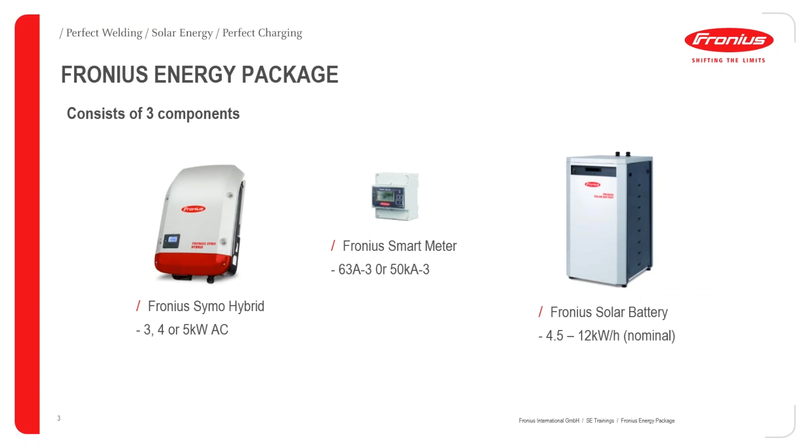So the Fronius energy package consists of three components. That's the Symo Hybrid, which comes in 3, 4 or 5 kilowatts. The Fronius smart meter, being three-phase of course, because it's a three-phase inverter you'll need the three-phase meter. That comes in a 63 amp or the 50 kA, which is the larger. And then you've got the Fronius solar battery, which is 4.5 kilowatt hours to 12 kilowatt hours nominal, at 80% depth of discharge.

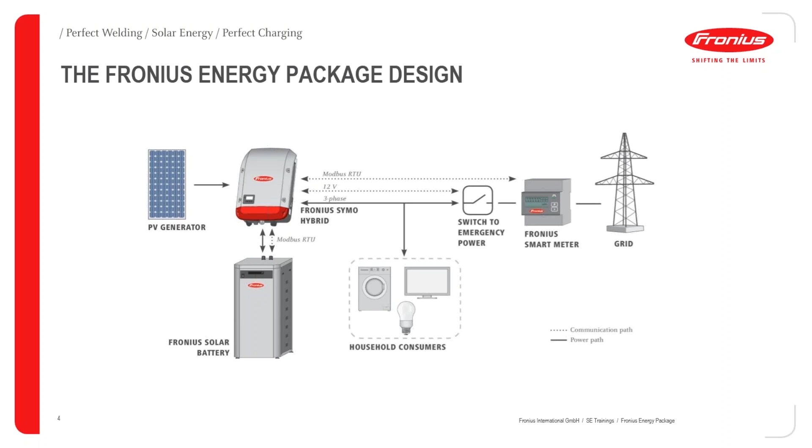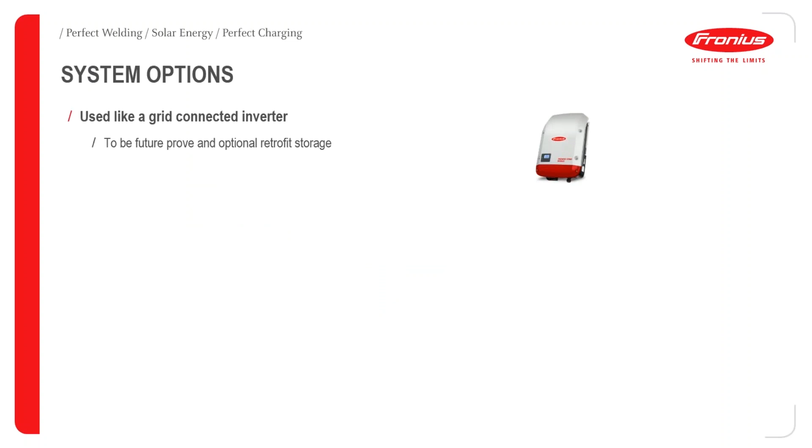So in terms of what it actually looks like, you've got your PV connected to your inverter, and then the battery is a direct connection to that. Then you have your meter, which is placed in the main switchboard and uses a Modbus RS485, Modbus RTU connection, so that the system knows where the energy needs to go, be it from the PV to the battery to charge it or to discharge it. And then you've got the loads there in the middle.

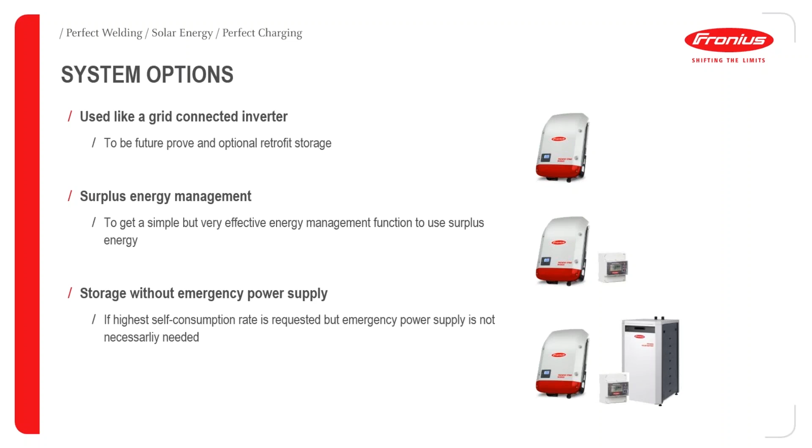In terms of system options, the hybrid can be installed by itself, used as a normal grid connect inverter with your normal PV and no meter or battery. Then you can add the meter at a later date if you want to do some energy management, for example turning on external loads depending on what the site's doing if you've got excess energy. And then also have the battery in there, so any excess power will be stored into the battery.

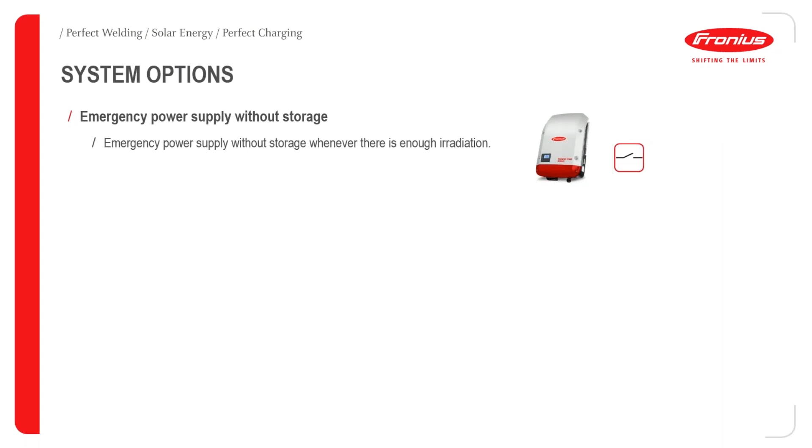When it comes to the emergency power supply, the backup function, that will be available mid-year, so around June, July this year. What that is: if the grid goes down, the inverter will disconnect from the grid through an external contactor, start up in island mode and provide power when the grid's down.

It can actually do that also without the battery. So long as there's enough irradiation, enough sun, you can have it in backup mode even if there's no battery connected. Or if you want the full functionality, obviously with the battery connected, it's a more efficient or more robust option.

Then the Symo Hybrid inverter itself comes in 3, 4 or 5 kilowatts AC rating. That's the AC rating as the sum of all phases. So for the 3 kilowatt version, that's 1 kilowatt per phase, and for the 5 it's roughly 1.66 kilowatts per phase. Underneath that you've got the PV input max, which is 5, 6.5 or 8 respectively.

The reason why that's higher for that particular inverter is because, let's say for the 3 kilowatt version, you can produce 3 kilowatts AC, but the battery can also take in 2 kilowatts at the same time. Or let's say you have 2 kilowatts AC, you can do 3 into the battery, depending on which battery you've got. So the Symo, like the series says, short for symmetrical feed-in, is 3-phase.

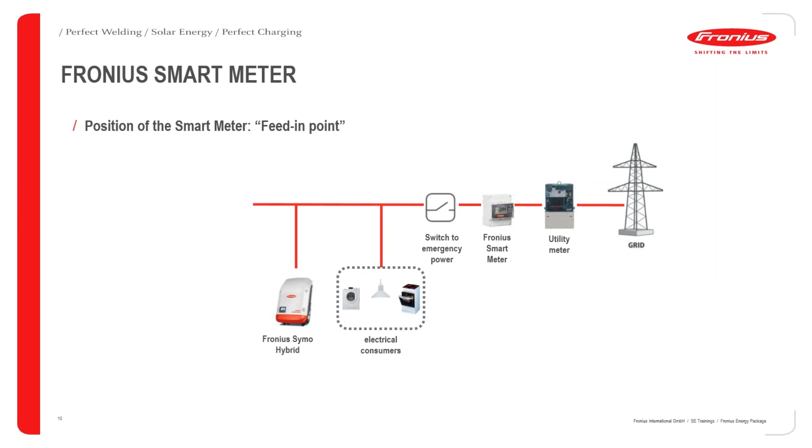So the Fronius smart meter can be installed in two different spots. Some of you may have already used the smart meter a fair bit. When you select the function on there, it talks about feed-in point or consumption path. The feed-in point, which is pretty much all systems here in Australia, is where the loads and the inverter are on the same side of the Fronius meter. So whatever the smart meter is reading, the value of the inverter needs to be taken away from that.

So if you're looking at the emergency power function, that's where the switch would sit. The meter needs to go between the contactor and the utility meter, so that when the grid comes back, the meter can detect it.

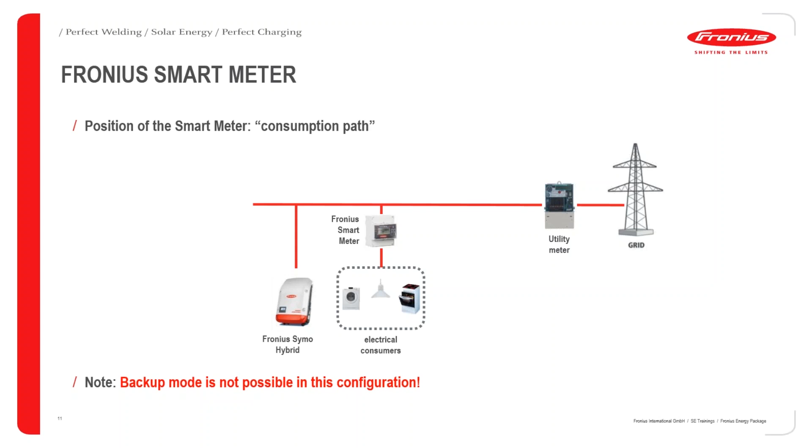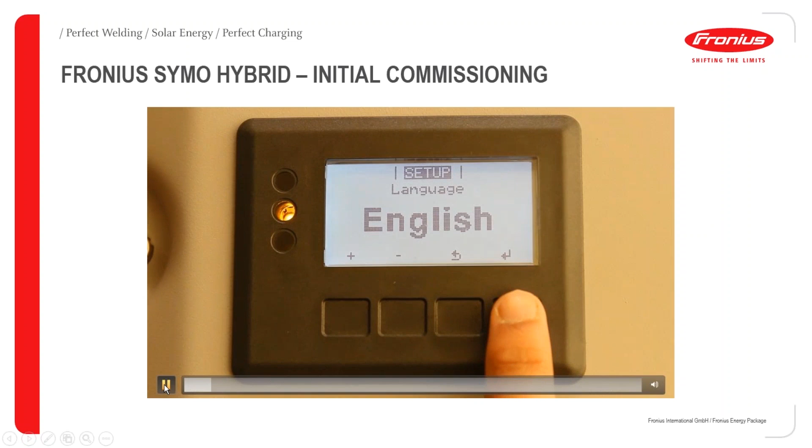The other point, which is shown on the Datamanager or the hybrid manager as the consumption path, would look like this. You can see essentially the inverter is on the grid side of the Fronius smart meter, not on the load side. That rarely happens here in Australia unless you've got gross metering, possibly for New South Wales, but they're coming off there anyway. That particular constellation could get used in Europe.

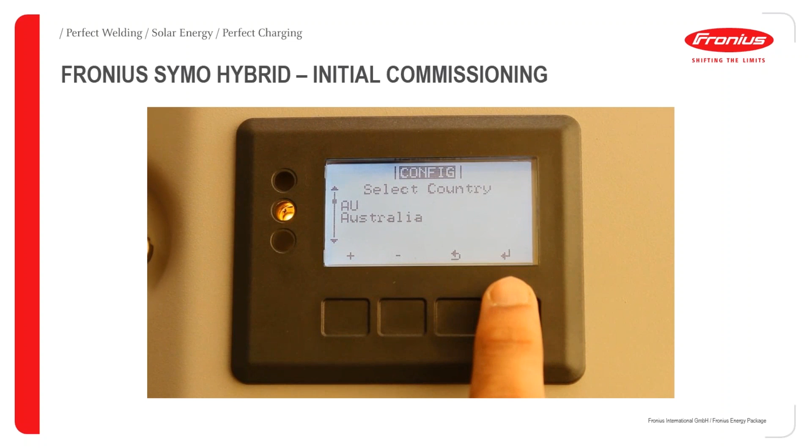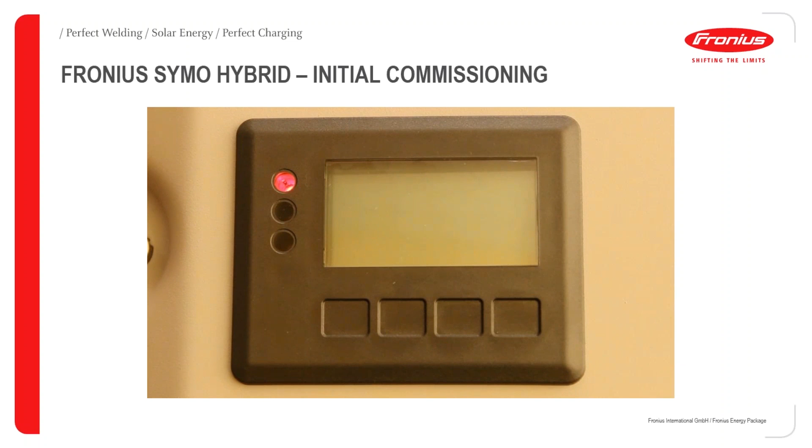So we'll get on to the Symo Hybrid commissioning. In terms of setting up the inverter itself, when you first switch it on, it's like all of the Snap inverter range. It comes up with English on the display, and I'll just play this little video and talk you through that. When you press English, it'll say wait, and it'll ask you to select the country setup. In Australia, some people get confused with using the 50 Hertz. Australia is 50 Hertz, but Setup Australia is the one you want to select.

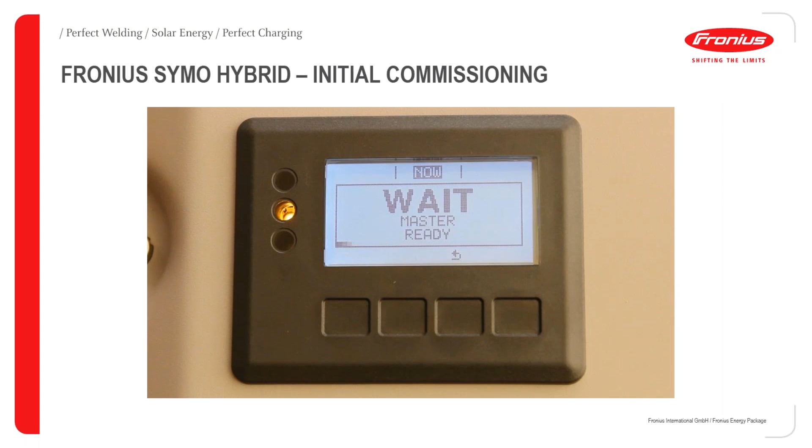When you do that, it'll take about 30 seconds or a bit longer until it actually loads the country setup. All the lights will flash on and off, and then it'll come up with wait master ready or wait communication. If there's DC connected, it'll start up. But this particular model we've set up in our showroom doesn't have any DC, so it just comes up with the info page. That's the initial switching on of the inverter. You may be asked for the time and date, so you just need to enter that as well.

Okay, then to the hybrid manager setup. In the inverter itself, if any of you are familiar with the Datamanager, it's a very similar board. We call it the hybrid manager because there are a couple of little differences between this and the Datamanager. There are a lot of similarities, but there's the odd little difference. One of the main things, if you look underneath the hybrid inverter, you'll see the USB slot is covered over with a little cover. That's because the software updates are not done via USB, as opposed to the other Snap inverter range.

The Symo Hybrid has different software running in the inverter compared to the other units, and that's why it doesn't get done via USB. All of the updates get done via the internet, as you would do a Datamanager update. You'll also notice that there's no master-slave switch on there. That's because only one hybrid can be in the system at one time, because the hybrid inverter is part of an RS485 communication loop, and the inverter is the master in that, and in an RS485 loop you can only have one master.

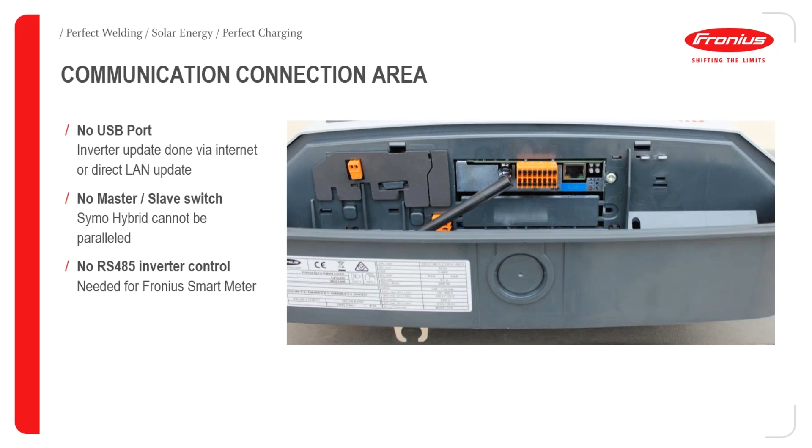So the meter and the battery, if they're in the system, they're in there as slaves. So that's why you don't have the master-slave switch. And the one thing to remember as well is, if you're looking at using external controllers to control the inverter, you can't control the inverter via RS485 as you can with the other ones, because we use that port for the meter. So if you did want to externally control the inverter, then you can do that via Modbus TCP, which is done via the LAN port if needed.

Okay, just to give you a bit more of a close-up of the hybrid manager there, you can see on the left there you've got your Wi-Fi antenna like usual. There's the Modbus termination switch, so depending on where the inverter or the battery or the meter sits in the chain, always the first and the last component needs to have a 120 ohm termination resistor there. So if the hybrid inverter is the first one or the last one, so not in the middle, then that little 120 ohm resistor is already built into the card, but as a switch, so you can turn it on and off. So just above where the antenna is, there's this tiny little black switch, which you need to switch to either on or off depending on the situation you're in.

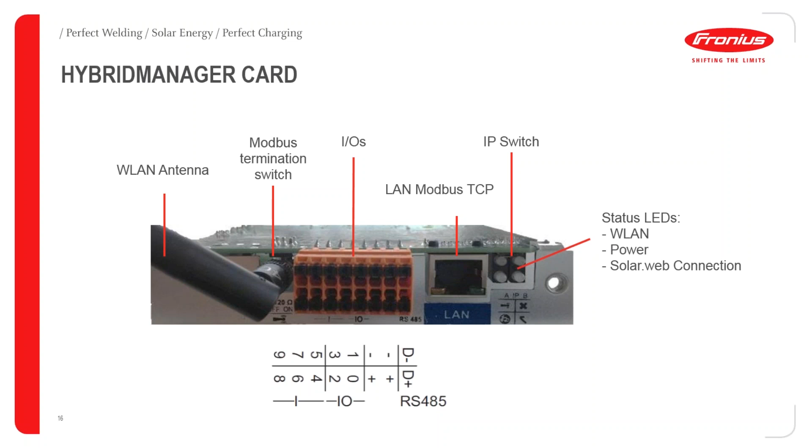Then you've got your I/O ports there. You can see the configuration down the bottom with your D- and D+ for your Modbus ring, and then you've got other I/O ports there which can be configured for different situations. You've got your LAN port there, just like on the Datamanager, to be used for internet if you want to, and then you also can use Modbus TCP commands over that.

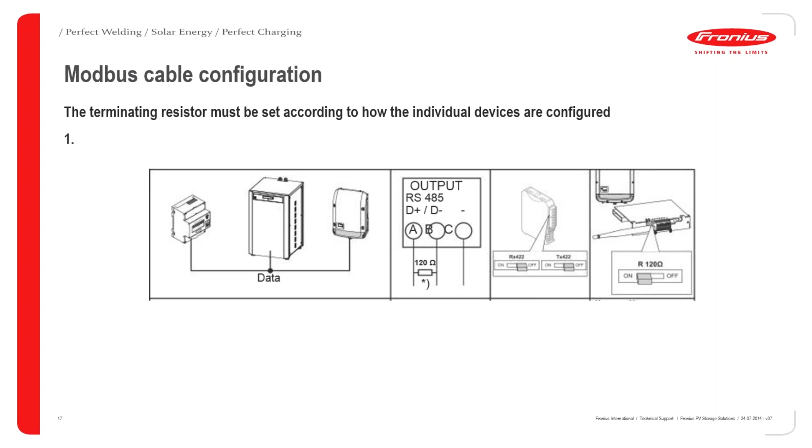And then you've got your IP switch like the normal Datamanager, that little white switch where the 4 LEDs are. So the status LEDs on this: you've got your WLAN, so your wireless, you've got your power, which is the tick, and then your Solarweb connection, which is the globe. So the cross doesn't get used on this one because there is no internal SolarNet ring with the hybrid, so that one's not really getting used.

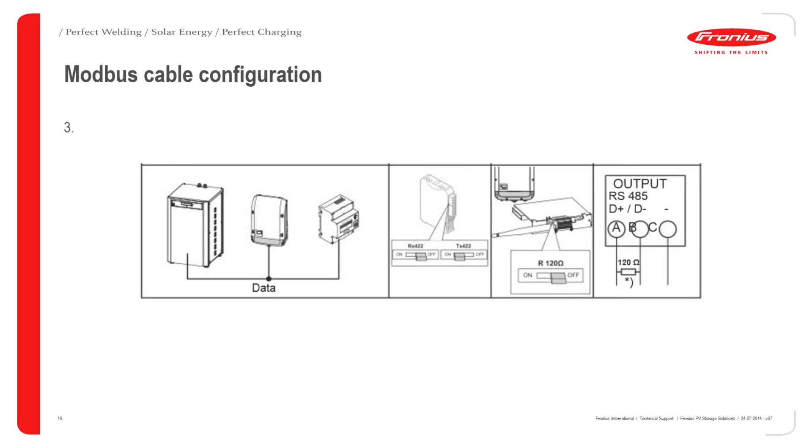So when I'm talking about that 120 ohm resistor, this is just a little bit of an excerpt out of the manual. You can see this particular configuration has the meter first, then the battery, then the inverter. So in this case, the 120 ohm resistor would be connected on the meter, which is usually stuck to the side of it, and then the inverter, so the hybrid manager, would also be set to on. The one in the middle is a battery, which is on the uni gate. That would then be set to off because it's in the middle.

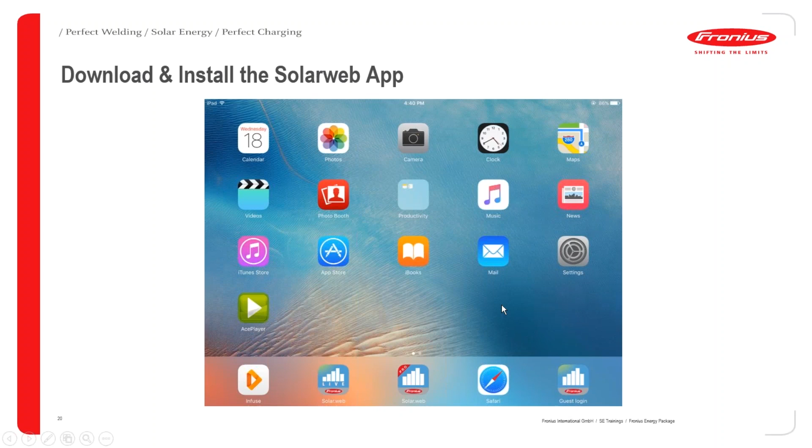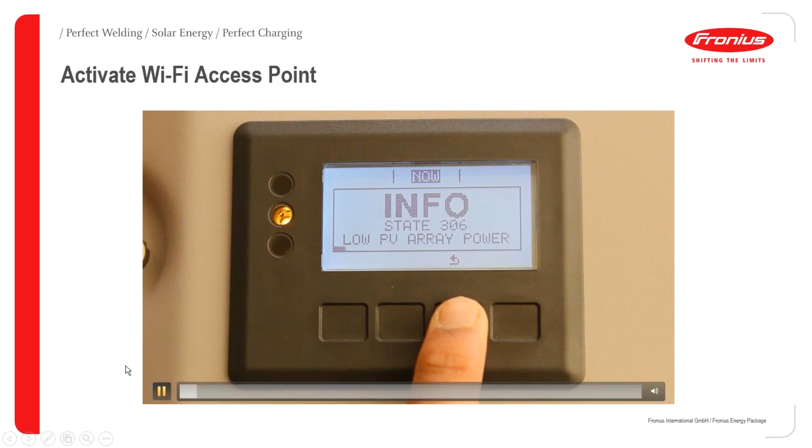Okay, so getting started with setting up the hybrid manager, you need to download and install one of the Fronius apps, so either the Solarweb Live app here down the bottom, or the Solarweb Pro. The Live app is free, and the Pro app's about $4.99 from one of the app stores. So once you've got that downloaded, then you want to activate the Wi-Fi access point on the display of the inverter. So I've got a little video to show you how to do that.

So you go to the setup menu, scroll along, and under setup there'll be Wi-Fi access point, the second one down, and then it's activating the access point there. So once you've got the access point activated, you'll see on the display it says SS, so that's the SSID, in other words the network name. That'll always be Fronius underscore, and for the hybrid inverters you have a 239 number. Normal grid connect inverters would be a 240 number, and then sequential after that.

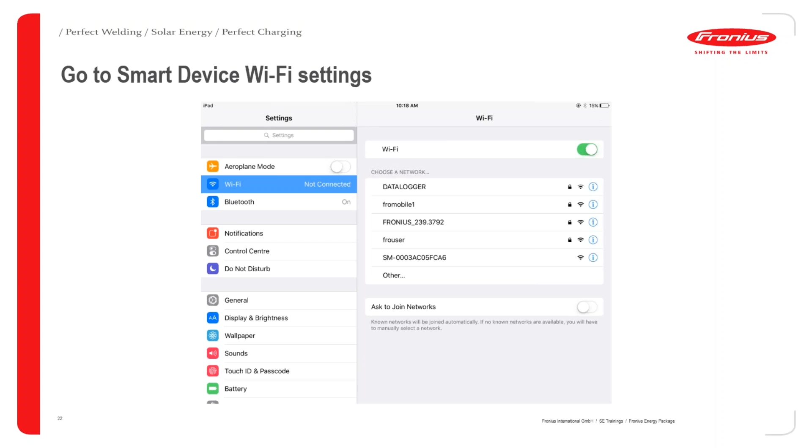Then PW is the password, so as with the grid connect inverters it's 1 through to 8, which you need to enter. So that Fronius underscore 239 number, that's also what we call the data logger ID. So when you're registering the system on Solarweb, that's the number you need to enter into your system on Solarweb so that it knows where to send the data to.

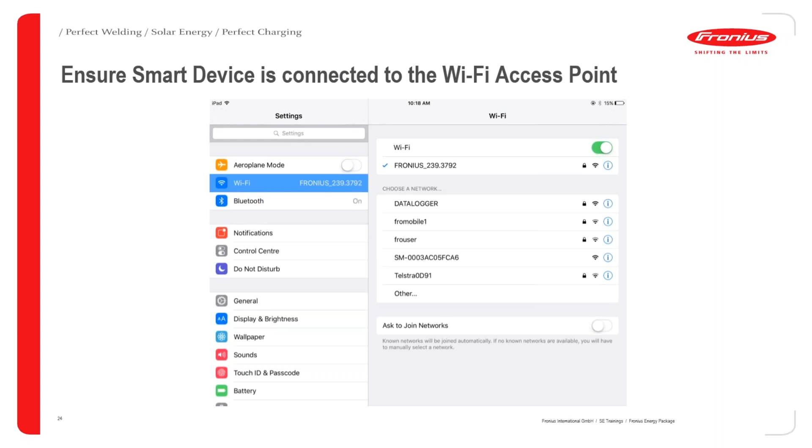Okay, so once you've got the access point activated, then on your smart device, so you can either be an Android or an iPhone, iPad, so an Apple device. These particular screenshots are done from an Apple device, so they may look a little bit different to your Android, but should be pretty similar in terms of where you need to go.

So you want to go into your settings of the device and under Wi-Fi settings, and you'll see appear on the screen there that Fronius network, the 239 number. So you want to click on that. Then it'll ask you for the password, which you put 1 through to 8, and then make sure that it's come up and connected with a tick next to it. That means your device is actually connected to the hybrid manager. We want to be connected to that because what we want to do is configure the hybrid manager from the smart device.

So once you go into the Fronius app, as I said, the live or the pro version, in this particular case you want to do the technician wizard. So you can see here you've got the choice of a Solarweb wizard or a technician wizard. With the hybrids you want to do the technician wizard first and then the Solarweb, whereas with the normal grid connect inverters you would usually just do the Solarweb wizard. So we'll run through that first.

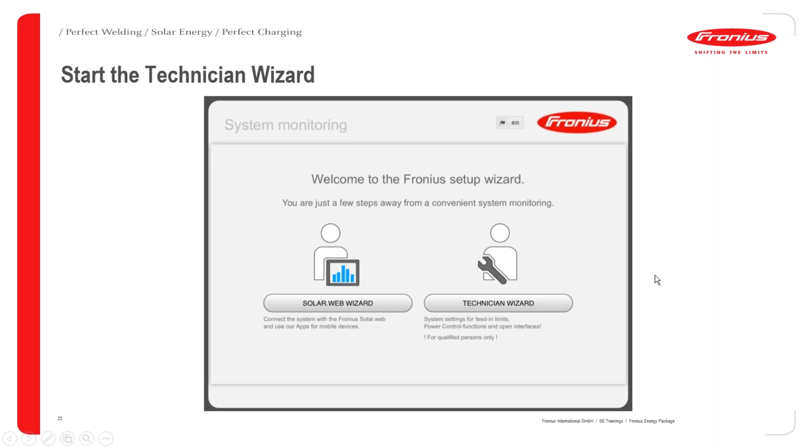If by chance your technician wizard is grayed out, then you need to go into the actual app settings. So when you go under general in your smart device, you'll see there's some general settings for all the different apps you've got on your device, and under that you'll see that you can activate installer mode. That can also be done in the app itself. So the Solarweb app, when you go into that and you go into settings, you have the choice there of activating installer mode, and that will then allow the technician wizard not to be grayed out.

Okay, so the first thing that will come up is just the general settings. So you need to give it a system name. This test system is given Symo Hybrid, so you would call it, I don't know, John Smith's hybrid or whatever you want to call it. You may have different other things you'd use, postcodes, etc. Just put in whatever you want there.

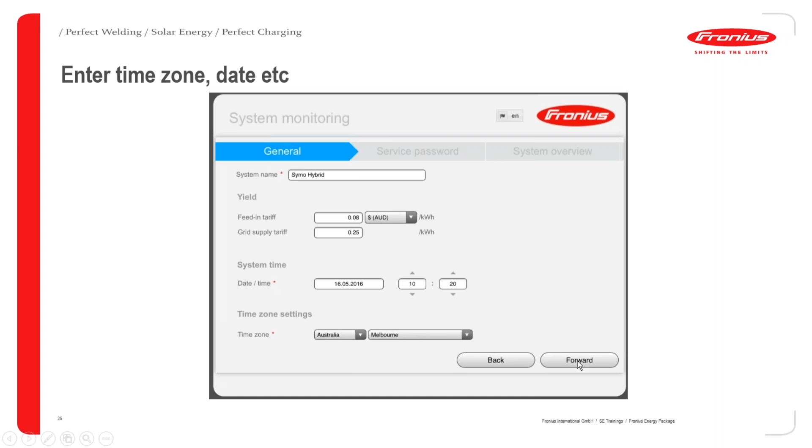Then it's got the yield, the feed-in tariff and grid supply tariff. You don't really need to put them in if you don't want to. They're just like default settings because you can enter them in Solarweb later on, and Solarweb will then give you the correct value. So unless you've got a system which is actually not connected to the internet but has a network and you get to it, then you can put the settings in there if you like, but it's not essential.

Then you've got your system time, which should usually synchronize to your device itself, so whatever the time and date is on that will automatically synchronize. You just need to set the time zone, so the country and then the nearest major city in terms of your time zone settings. Then you would hit forward.

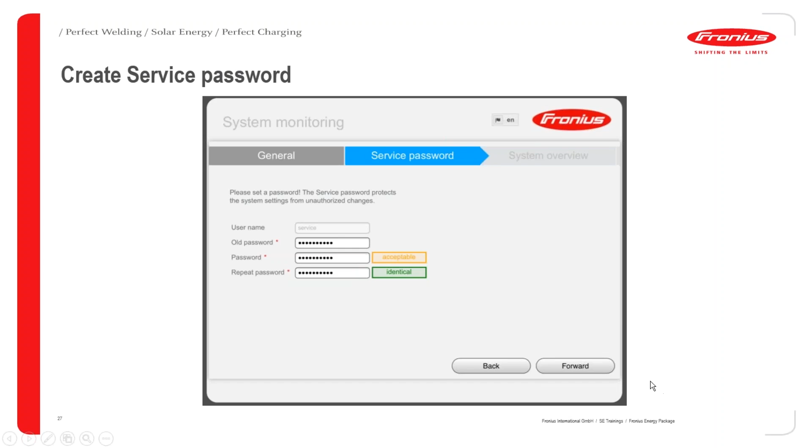And the next step then is setting the service password. So in here, because we've set this up before, it has the old password there, but in a new system you would just have the line there, password and repeat password. To set up the service password, the service username is service, and possibly you could use something like service123 or something that you're going to remember.

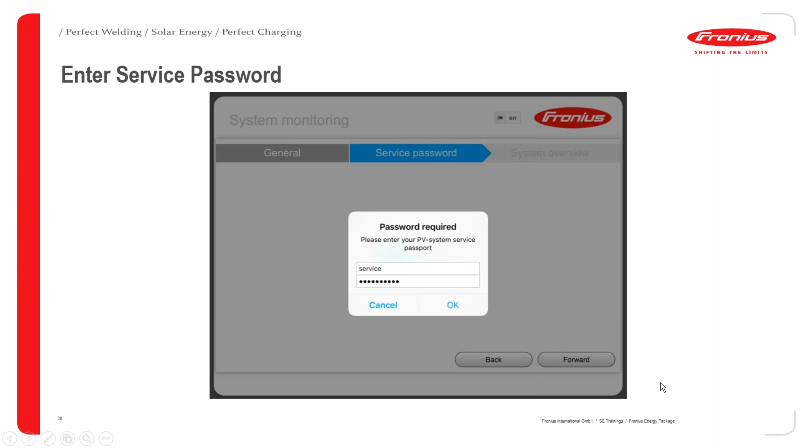But you want to use something that essentially doesn't get used by the end customer, because this is a section where you can actually adjust and set up export limiting, so that's why it's a separate password for this section. It also has the meter settings in there too. When you set that up, obviously it needs to be letters and numbers, so you can't just have just numbers or just letters. It needs to be a mixture of both for it to be accepted.

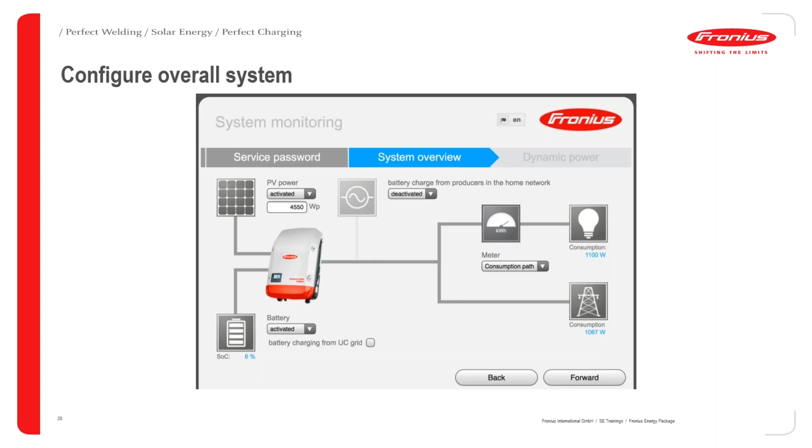So once you've entered that, then it'll ask you to actually log in via that and make sure it works. So you put in service as your username, and then you'd put in the password you just created and hit OK. Then the next section is configuring the overall system.

So it comes up with system overview. So you get a picture of all the different pieces of the puzzle there. So on the left you've got your PV power if it's connected directly to the inverter. You've got your battery, any other AC sources on your home network, and then also the meter, which path the meter is in.

So for the PV power, if there's no modules, some people may be using the hybrid inverter in an AC coupled mode, so you may have a grid connected inverter already there and you just want to add the battery, so you're adding just the hybrid with the battery connected. Then in this case you would deactivate the PV power, but I believe in most cases in Australia at the moment you will have panels directly connected to the hybrid.

So you activate it and you put in the amount of DC power you have connected to it. So not the AC power rating of the inverter, but the DC that you've got connected to it, in watts and not kilowatts. So yeah, if you're not using it, you deactivate it, and then you've got the battery.

So when you're setting up the hybrid, one thing I forgot to mention at the start is you want to do this once everything's been connected. So you've got the inverter connected, the battery's been turned on and all wired up, and you've got the meter all turned on and wired up. So the whole system's been turned on, and then you want to go through with this commissioning here.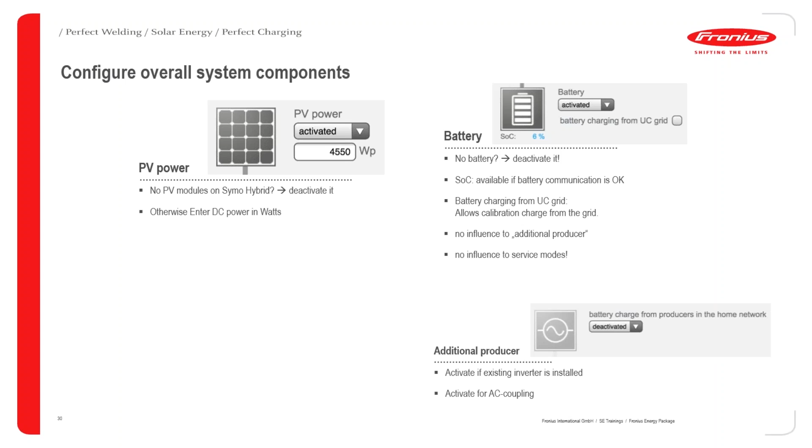So if you want to do that, what that does is allow the calibration charge, which gets done every now and then. There's a lot of different factors that determine when that happens. So it could be once a month, could be once every 2 months. It just depends on how the battery is getting used, if it's being discharged or charged completely.

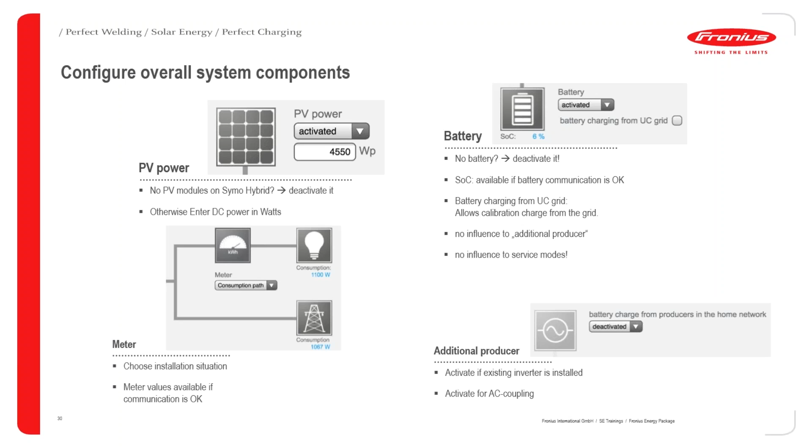That's a fully automatic function, and the calibration charge means that it charges right up to 100%, so that all the internal measuring equipment and devices are calibrated every now and then to give the correct readings.

So then additional producer: if you've got another AC source, let's say another grid connect inverter in the system, then you would activate that, and then you'd put in the AC value of that other inverter. If you don't have another one, then you would deactivate that. Then you've got the meter, so choosing consumption path or the feed-in path. As I said, pretty much 100% of installs here in Australia will be in the feed-in path.

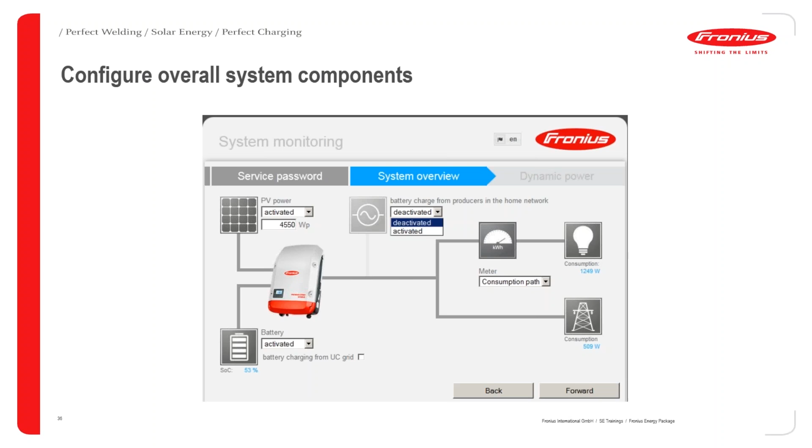Once you've selected that, then it will come up with the reading on the display. So here gives you a bit more of an idea what it looks like. If you click on the drop-down menu, you can select activated or deactivated. Activated in this case. The battery is also activated in this case, and you'll see that the state of charge comes up. In this case it's saying 53%. Then in this case they've selected the consumption path, and it will come up with the amount of watts on the side there.

So once you've selected one of those, it will look for the meter. So it's saying it's been activated, it's trying to find it, and once it's found it, it will come up with OK and give you the power reading that it's actually reading from the consumption. The other thing there is your battery charging from other home producers in the network, deactivated or activated, and then you go.

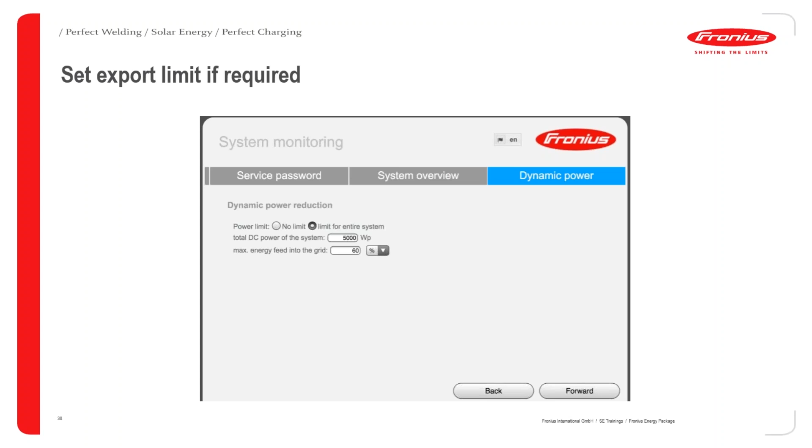So the next step would be dynamic power reduction. That's if you've got requirements from the network to have export limiting. If you don't have any export limits, then you just do no limit. Otherwise, if you did, then you tick limit for entire system, and then put in your total DC power of the size of the system.

So not what the inverter is. If you've got maybe 6 or 7 kilowatts on the inverter, then you would put that in as a watt value. And then you can either set the maximum feed-in to the grid as a percentage, or you can set it as a watt value.

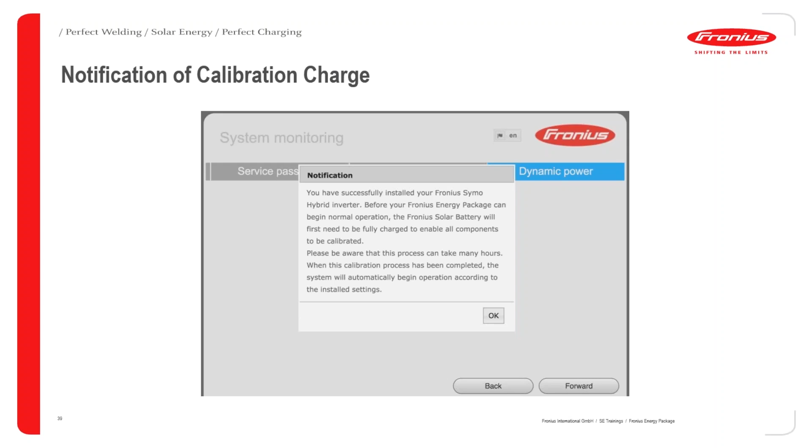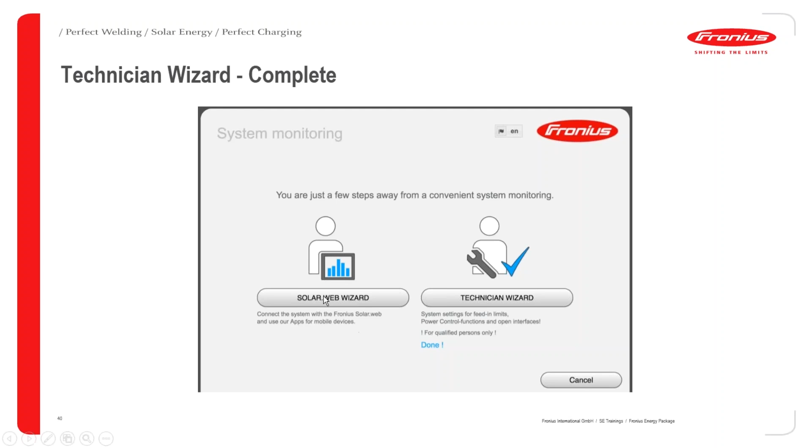Just remember, with the Symo Hybrid: with the normal grid connect inverters, we've brought out the zero feed-in or the zero export function, or actually down to minus 10%. With the hybrid, that's not available yet, so the minimum export of the hybrid is around 10%, so we can't get any lower than that.

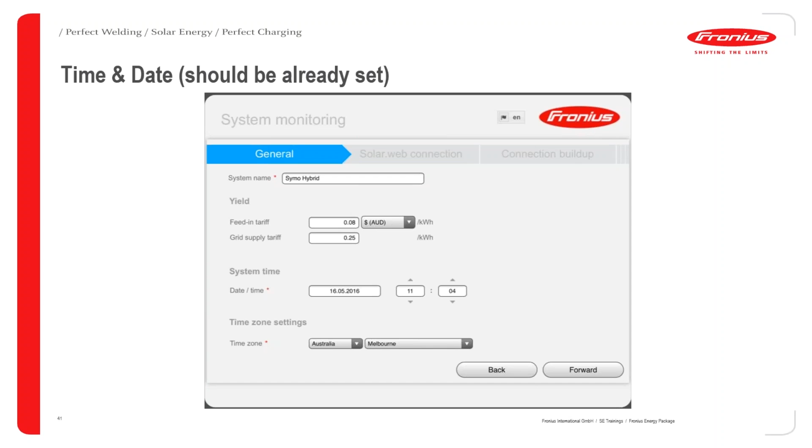But being a three-phase 5 kilowatt inverter, there's usually very little call for export limiting with that. That function will be coming out later on this year as the zero export function. Don't have a definite date for it yet though, that's all.

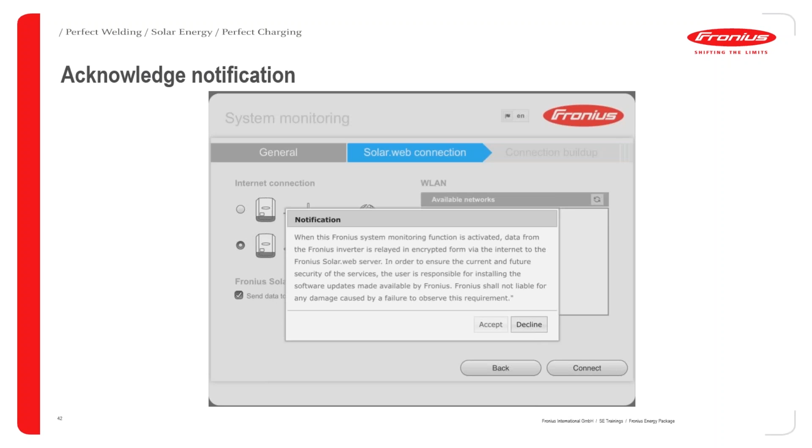You've set that up, and it's basically going to do the calibration charge, and depending on how you've got the settings set, if you can charge from the grid or not, then this may take a few hours. Okay, once you've done that, that's the technician wizard set up, and you'll see there'll be a tick next to the little man there on the screen.

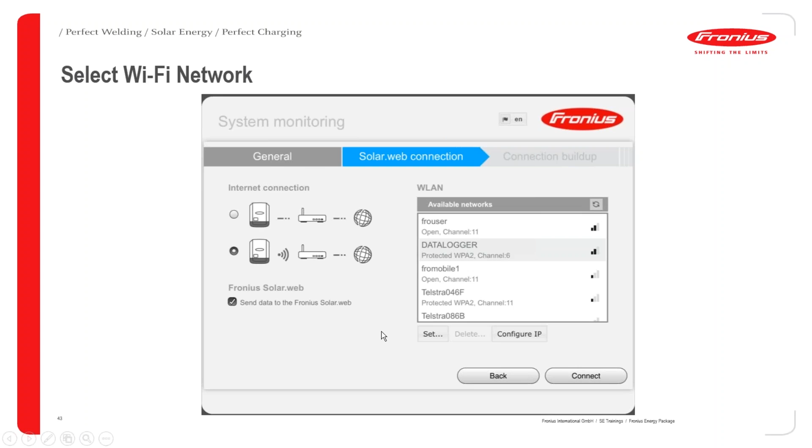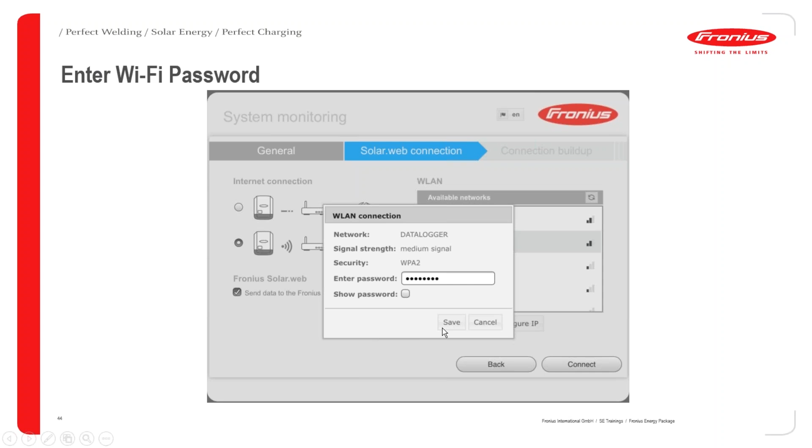Then you want to go and start doing your Solarweb wizard, so you can actually see the monitoring on the site, so you can see what's going on in Solarweb. Okay, so once you go into the Solarweb wizard, it'll come up with this page again, which you shouldn't need to do any changes on because you did that before. So it's getting confirmation that the general settings are correct, because sometimes some people may do this at a later date.

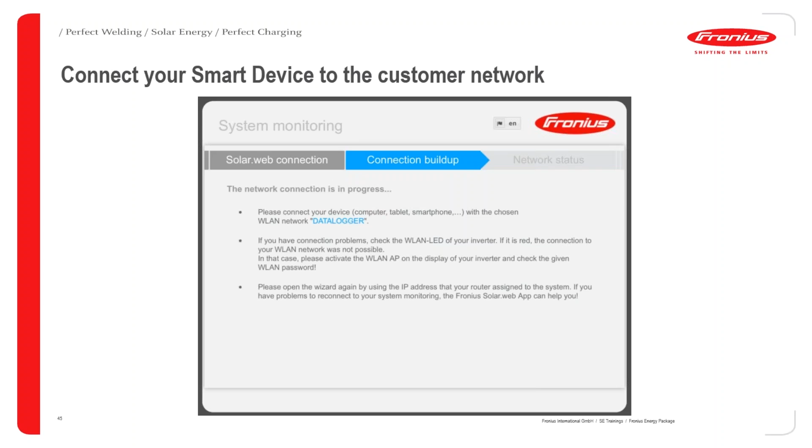Then you've got your Solarweb connection, so this comes up saying that the data is encrypted going to our server. However, you need to install the latest firmware to make sure that's all working properly. So once you've done that, then you've got Solarweb connection. You've got the choice here of either a LAN connection, this symbol here, if you've got a hardwire connection, or this connection here, which is the Wi-Fi. In this example we'll do the Wi-Fi.

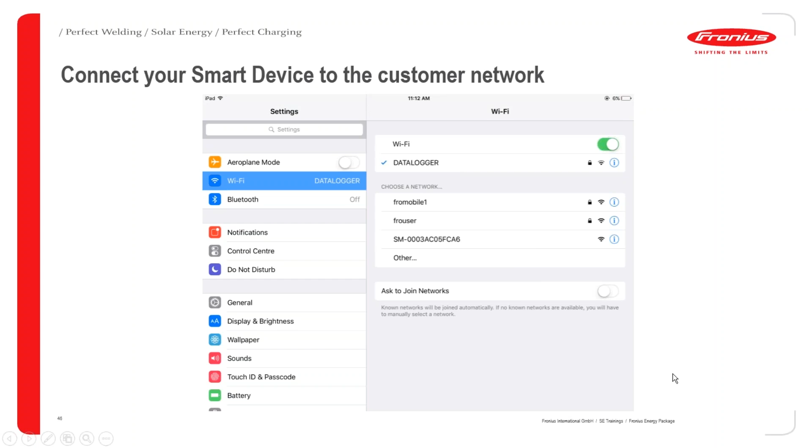So here you've got your WLAN, your wireless LAN networks, which will show up. When you're setting it up for your customer, you should see the customer's network. You then select that network and do connect, and then it will come up with enter password. So you put in the password there and hit save, and that will then start trying to connect to the customer's network.

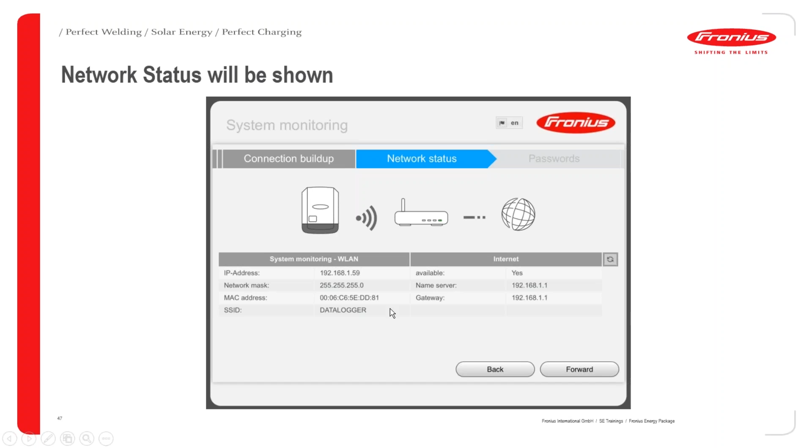So what will happen there, this will come up on your display. It will say the network connection is in progress. Please connect your smart device to the chosen WLAN network, and it will say the name of whichever one you've chosen. So what you want to do is connect your device to the customer's network to make sure that you've got a complete communication loop there.

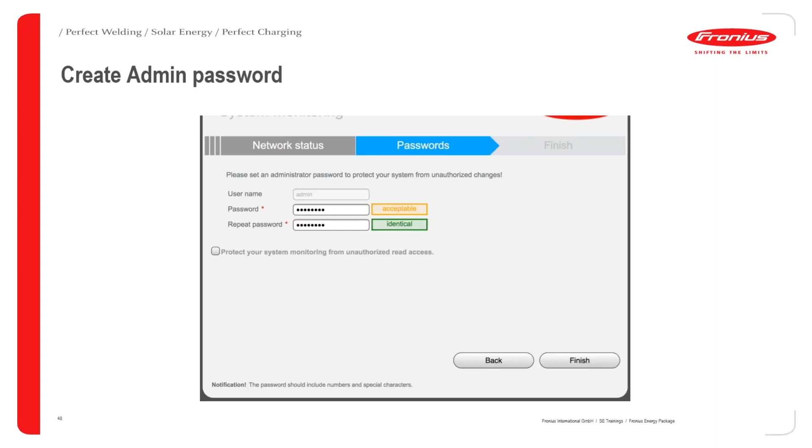So you would go into the settings of your smart device. In this particular case, the customer's network is called Data Logger. This is our test system. So you would connect to Data Logger. Then you would go back to the app. So you'd open the app again, it will do a bit of a search, and it'll come up with this page.

So this will give you information about the IP address, your subnet mask, MAC address, if it's got the internet available, gateway, all this kind of stuff. Most of the time you won't need that, but this gives you information in case you do.

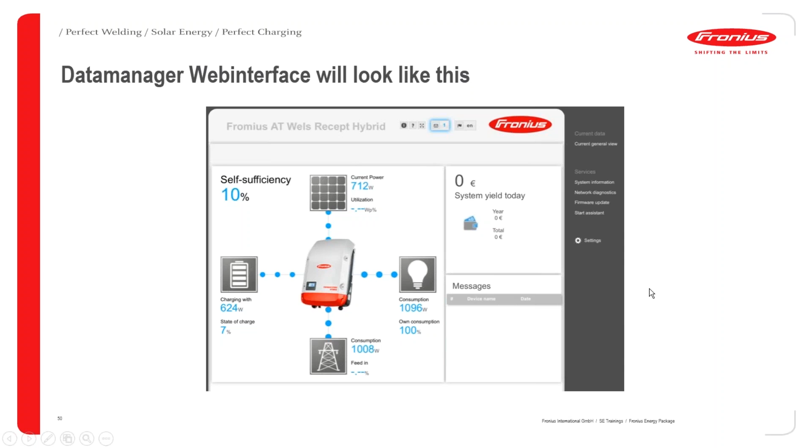So the next step is setting up the admin password. The first password you set up in the technician wizard was a service password. That's for a certain part of the settings of the hybrid manager. And then you've got the admin one, which covers the top section, which is the more basic settings. So again, you need to use letters and numbers for that.

So once you've entered that, it'll go through and you'll come up with your bar, and you'll have your finished, and they'll ask you to go to the home page of the Datamanager, and this is what it will come up with. So it does look a bit different to the normal Datamanager one. It has the picture on the interface exactly like this, so you can actually see exactly what's going on there, giving you the battery charge or the grid consumption, etc.

So just to cover off some of the differences on the left-hand side here, when you go into the settings of the Hybrid Manager, there are a few additional settings, additional tabs, as opposed to the normal Data Manager. So I'm just going to cover the ones which are not on the normal Data Manager. If you're looking to see what the information is on the other ones, then you can look at one of our other webinars where we've got some quick guides to give you more information on that, or the manuals.

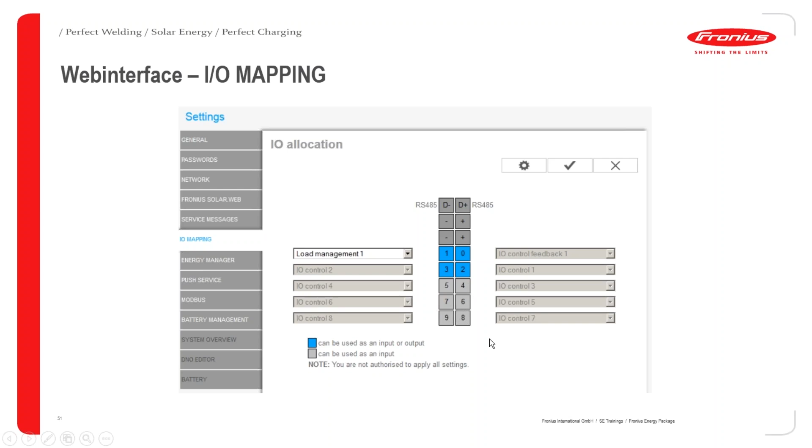So I/O mapping. What this does in this case is more for looking into the future as well, introducing more functions for the Hybrid Manager. For example, when the Tesla comes out, then you'll be mapping here for whichever you want to do. So, for example, one of the pins here will be mapped for the logic high-low. There'll be some for the Modbus, and other ones for +12,

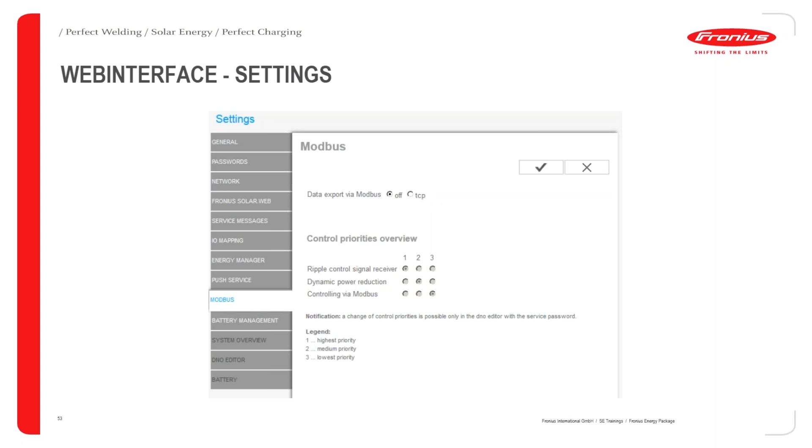and there'll be some other triggering. For example, if you've got the emergency backup or the emergency power supply function, a couple of these will also be mapped for that. So, for example, your contactor auxiliary feedback and your relay contact to trigger the contactor. So this can be configured in lots of different ways. You can configure it also for ramping control, etc.

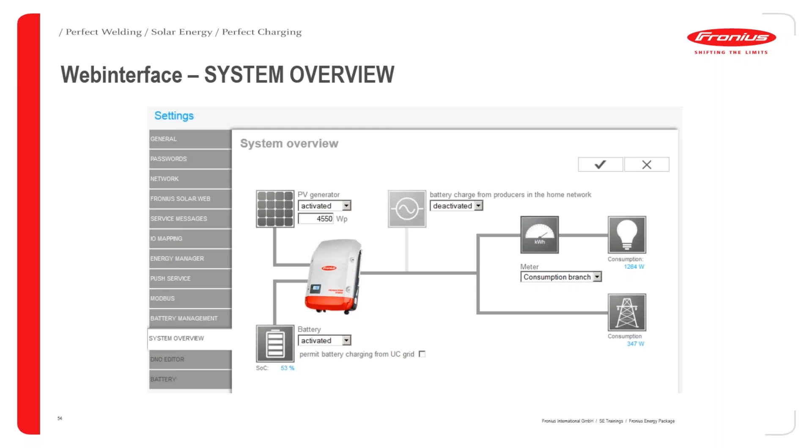Then Modbus, that is on the Data Manager as well, but just to give you a bit of an idea, you can see at the top here that it doesn't have the RS485, so that's not available for Modbus control. On here you can only use TCP. As I said before, because that's reserved for the meter, you can't use it for other kinds of controlling.

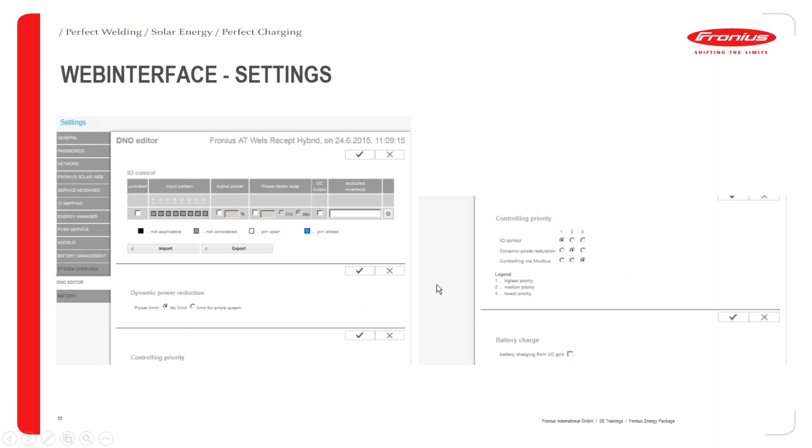Then you've got here System Overview. So the last three here, System Overview, DNO Editor and Battery, they're all locked away in the Service menu. And then in the Admin menu, you've got all of these ones. So let's say you did make a mistake in the Technician Wizard and something was set up wrong, or let's say you did the Solarweb Wizard first. It's not the end of the world. You can still go back and do the system setup here via System Overview under that tab.

So that's exactly the same thing that came up before, or if you want to do any changes to it, you can get into it that way. Then you've got your DNO editor. So again, if you want to do any dynamic power reduction at a later date, or battery charging from the grid, for example, for the calibration charge, you can allow that there as well. We can get to that in a different spot there.

Then you've got the battery tab here. So if you want to increase, for example, your minimum state of charge in operation or your charging current, I don't see any reason why anyone would want to change that. A maximum of 16 amps is set here anyway. But if you did want to change it, you can.

For example, minimum state of charge in operation. Let's say mid-year you want to actually have the backup function, then you can maybe set that a bit higher so you can always ensure that you've got a bit of power left in the battery if you do go into backup mode.

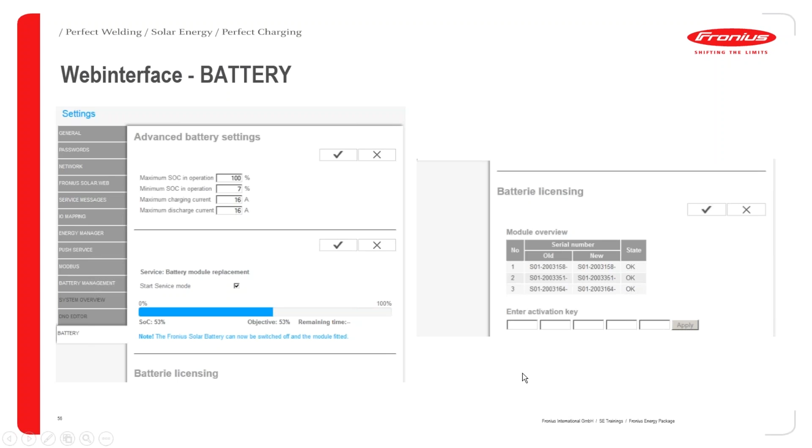So when you trigger that, depending on whether you're allowed to export to the grid, or if you've got load on, or if the batteries are below 53% and need to be charged, depending on if you've ticked charging from the grid or not, it will charge up to that state of 53%.

So that's that part there. If you're adding an extra module, then you would put in the activation key here. So on the side of the box, it'll have a serial number kind of thing, which you add in here, and you add that so that then it can recognize the battery.

So once that's all been set up, then on Solarweb you'll see on this little picture here the actual state of charge of the battery as well in the yellow. You see it going along, and also where these little yellow dots are is the battery mode. So that'll give you a few different things.

So you could have it as disabled, which means the battery is just in sleep mode. It could also be that there's a problem with the communication, but if it goes into sleep, then it'll just be in disabled mode. Normal just means normal energy mode. Of course, then you've got the service mode. If that comes up, it'll actually show you on there and whereabouts that is.

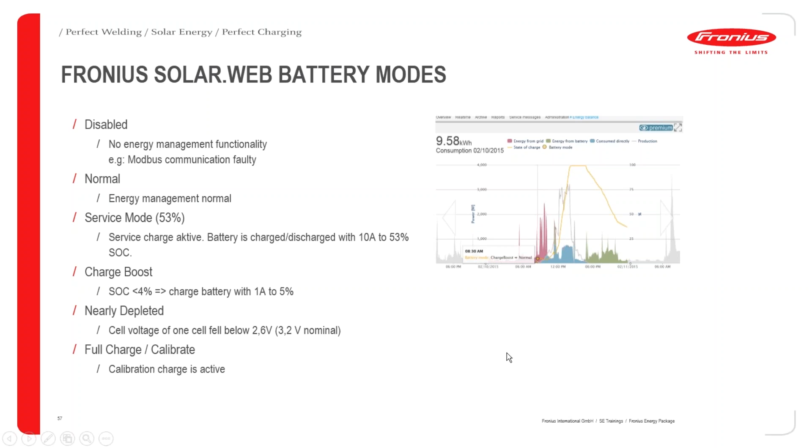Charge boost is if the state of charge gets so low because it never gets charged, like could happen in winter in Europe, then it will charge up to 5% to make sure it stays at a decent level there. Then you've got nearly depleted, which is more of a service thing which would come through, and then calibrate as well. You'll see when a calibration charge takes place, when it actually happens in there.

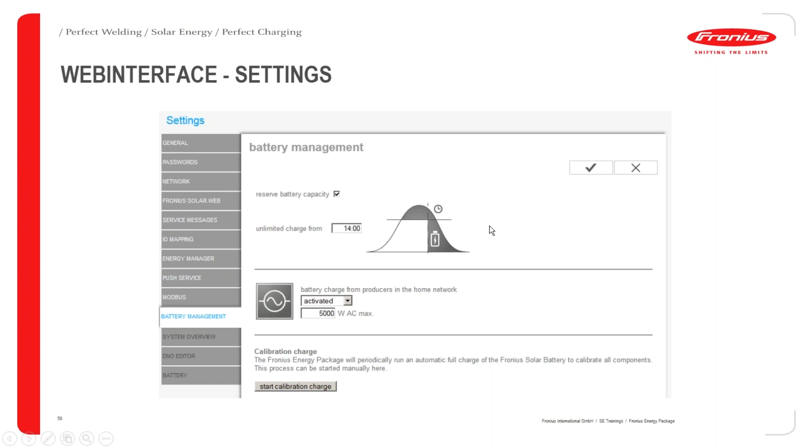So just going back to the settings there again as well. So battery management, here you can actually manually start the calibration charge if you wanted to. Then you've got another spot here if you want to change the battery charge from other producers in the home.

This unlimited charging, this is more for Germany, this particular thing here, so reserving capacity. They've got a rule in Germany that you have a 60% export rule if you have batteries. So this is to organise that with your 60% export limitation rule, you're making the most of the battery there.

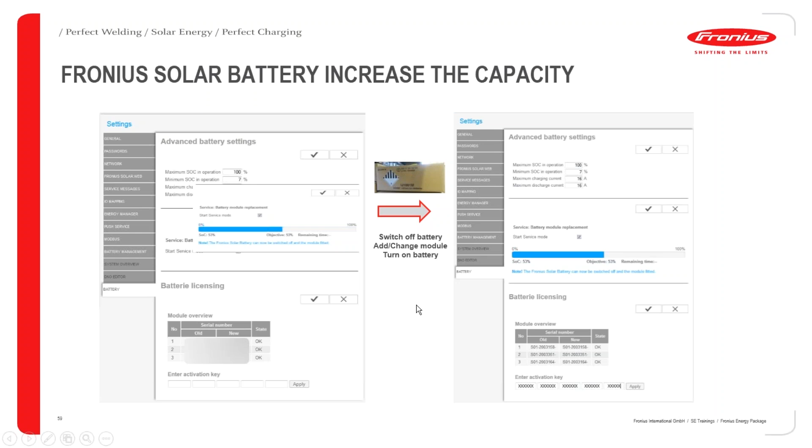If you're increasing capacity, I think I covered that a little bit before. So once you've got into the service mode, switch off the battery and add the new one to it. You can see here on the side of the battery you have your service code, your activation key, which you then put into here. So yeah, you go do the service mode. Once that's come up with okay, it's ready, then you put in the battery, put in the activation key, and then away you go.

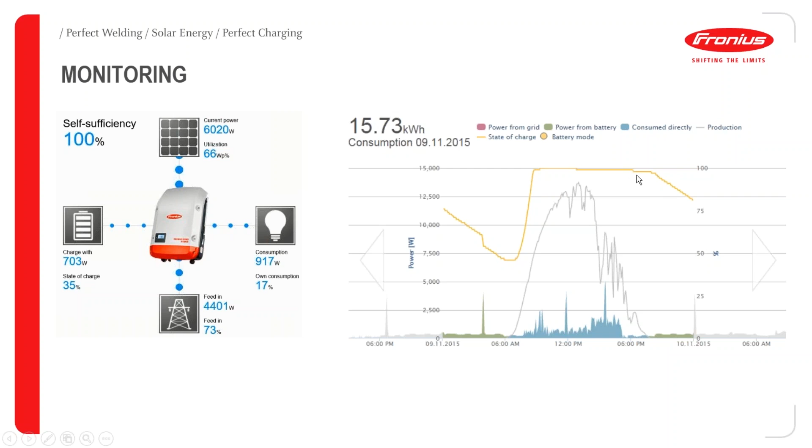Okay, so in terms of your monitoring, once you've got that set up on Solarweb, this is what it'll look like. This is an example of a system. You'll have the battery as the fourth leg now. So if you had a smart meter before, you would have just had your 3 legs, and now you have your fourth. So you have your state of charge, what it's charging with, and the rest of the other features on there too. And here, on Solarweb, you'll see this curve with now the battery status through there.

One thing I did want to cover, which you get asked quite often, is not so much to do with the setting up of the Symo Hybrid or the hybrid manager itself. It's more to do with the system itself. A lot of people ask, because it's a 3-phase inverter, what actually happens with single-phase loads, and how does that work? People think their battery can't supply enough power on one of the phases, so what happens to the rest of the energy? So just to give you a bit of an explanation of how that works.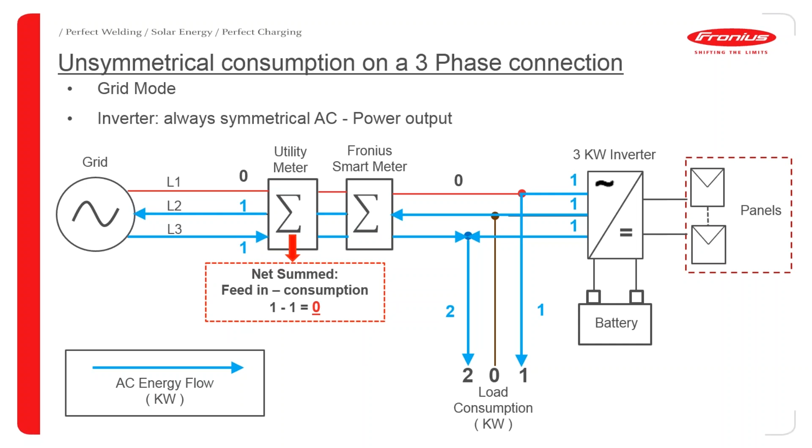When we get to island mode though, that's a bit trickier, because if you've got a balanced inverter, you don't always have 3-phase loads on a 3-phase site. So if you do have single-phase loads, there'll be power in the neutral here. Going through the same scenario again, you've got 1 kilowatt on phase 1, 0 on phase 2, and 2 kilowatts on phase 3. Because we're disconnected from the grid, any imbalance can't be pulled in or out of the grid anymore. It has to come from the inverter.

So in this particular case, you can have an unbalanced mode, and the inverter can cope with unbalanced loads. It's 2.5 kilowatts as a maximum on one of the phases. So you could have a 3 kilowatt inverter and have 2.5 kilowatts on one phase and basically nothing on the other. So in island mode, it does work differently. The additional power goes through the neutral in this case.

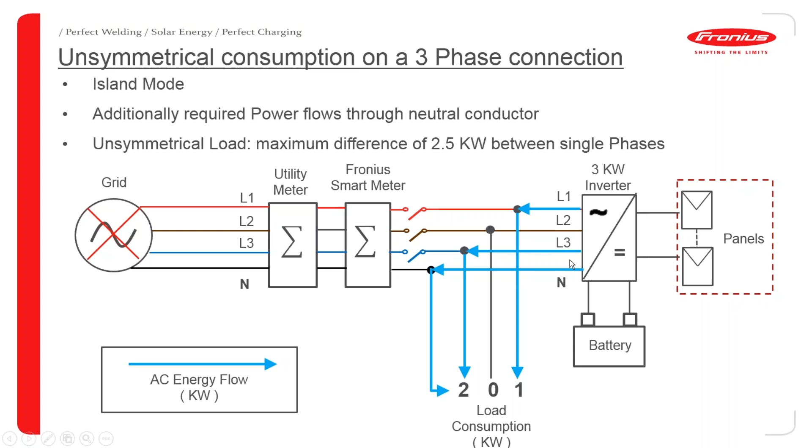Someone has asked here over the questionnaire: do I have to turn on the backup in the battery settings? So with that, no. For the backup mode you need to have a contactor in the switchboard, and that disconnects from the grid, and the inverter recognizes that it's disconnected from the grid and will then start up in island mode. There's a delay of, let's say, 5 seconds at the moment, but because the function's not there, we don't have the exact details for that.

But there's no actual setting needed for that. It'll just be a software update on the inverter. So when that function does come, it will be a software update. And then you'll need your 3-pole contactor and a small relay and auxiliary contact in the main switchboard for that.